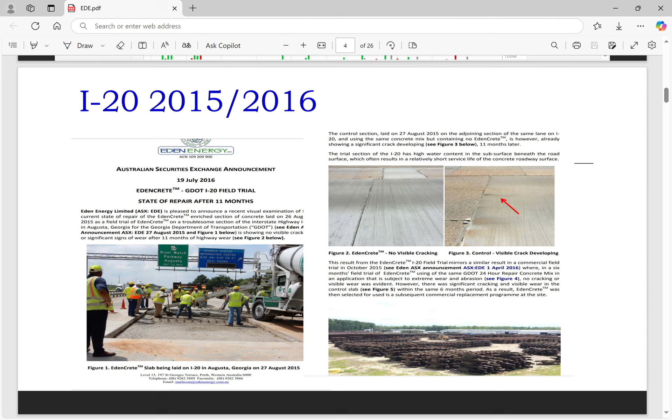It catapulted the share price 40x, one of the best performers in the Australian Stock Exchange at the time. So what is this product all about? At the moment, 2024, EDE has developed a few products already, but I'll focus on this edencrete.

Edencrete is an admixture based on carbon nanotube, and this is a result of research done at Monash University in Melbourne. Over years of research, they were able to come up with nanotube application as a concrete admixture, to increase the durability, flexural, tensile, and compressive strength and abrasion resistance of concrete, and reduces the shrinkage, permeability, and damage from salt and chemicals.

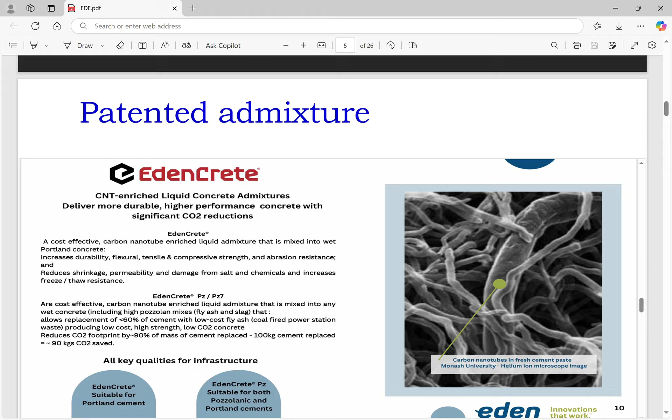So that's flexural strength. What is it? Ability of slab to resist bending. Tensile strength refers to resistance to cracking or breaking under tension, and concrete abrasion is durability from physical damage.

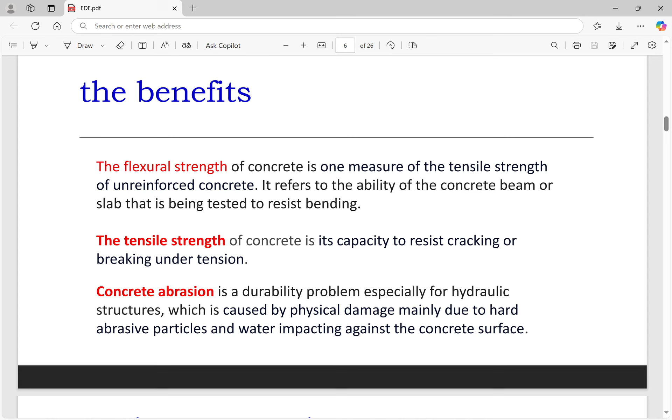If you Google carbon nanotubes, you will find that carbon nanotube is one of the strongest materials in nature. And so this was a learning part for investors. What's fascinating about investing in penny stocks is you'll learn a lot of things about the product.

And if you don't know about nanotubes before, you would have been very excited to learn about it in 2015 when investing in EDE. Carbon nanotubes show a unique combination of stiffness, strength, and tenacity. So there's a lot of information. This is just a snapshot from a quick search on Google, nanotube properties.

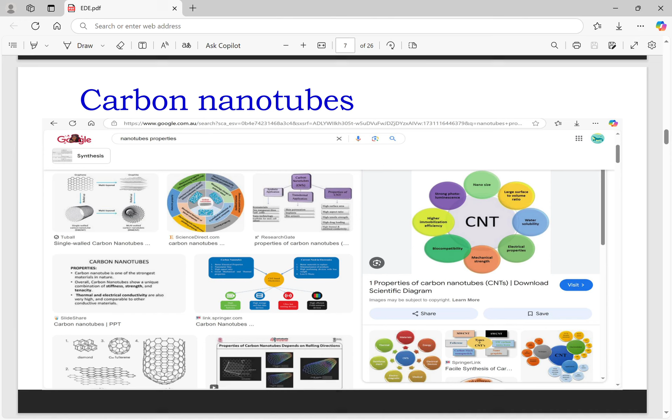So if you look here, these are slides from the company, not to encroach on copyright things. This is just for educational purposes. It's available publicly. Carbon nanotubes, this company has come up with applications into concrete, plastic, and the key properties. It's 100 to 300 times more strong than steel.

Amazing, isn't it? Carbon nanotubes, you can't see it with your naked eye. It has to be enlarged to show it like this, but you can just imagine it is up to 300 times stronger than steel, but it weighs 17% of steel.

That's why it was a breakthrough that Monash University came up with this output, that admixture application. It was exciting. We thought that as investors in 2015, 2016 in EDE, this was going to become a multi-billion-dollar company. You can't blame the founders, the Solomon brothers based in Perth, that they haven't given up on that vision.

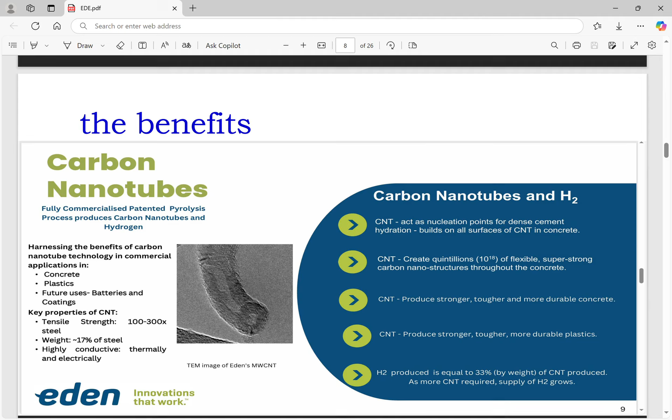In short, there was testing going on since 2015, very promising results there, as well as in various countries. Interesting that these tests were continued.

And in 2021, there's this test in Colorado Department of Transportation in I-70 Vail Pass. This is an elevated highway, 3,050 meters above sea level, I think that's the elevation. And it's subjected to such harsh conditions, especially during winter.

So what they have done here is test whether it's viable to use concrete rather than asphalt. I think on this road they used asphalt because it's easier to repair, although the repair has been very frequent. With asphalt, the cure period is faster, maybe in one day cars can go through again, as opposed to concrete where the curing period is longer. But they wanted to test concrete side by side with asphalt, and they created this test in 2021.

It's not just to test concrete versus asphalt, but also an opportunity to test admixtures in concrete, because Edencrete, the product of EDE, was already approved as an additive in concrete projects. In other words, it's been tested in Colorado for a long time, so it's now accepted and in their procurement catalog, so they can buy it.

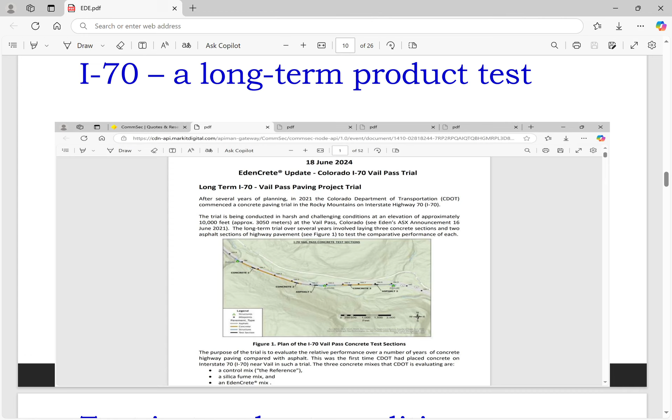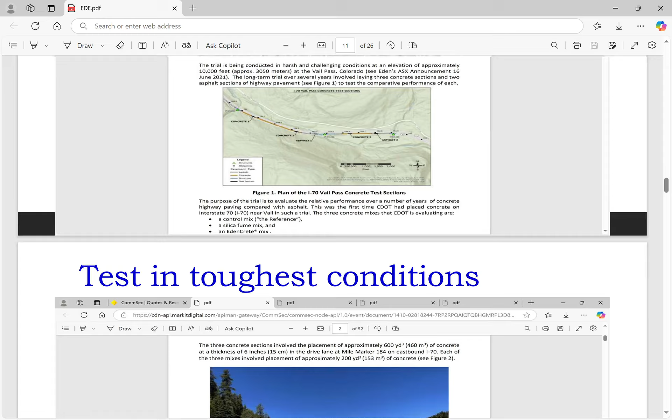So what they did here is create 3 sections of concrete on this road, alternating with asphalt. In the concrete portion, there's a beginning, middle, and end part, where they tested against the control, meaning concrete with no additives, and then 2 other additives that were added: one is Edencrete and the other is silica fume.

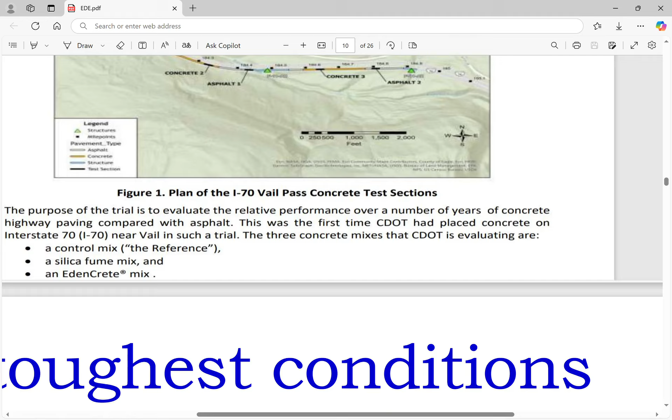The technical results were released to the company. I'm not a technical person, so I'll just go through the pictures that were presented and taken by the company. So here is the section of road, I-70.

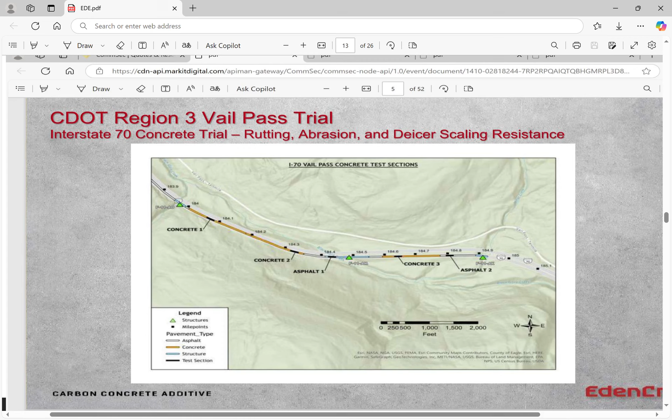Here are the pictures shown after the first, second, and third year since the concrete was laid side by side with the asphalt. This is the reference, meaning the section with no additives added, at the beginning section of the road. You can see that in the first year there's a crack developing on the left corner. By 2023 and then 2024, that crack has increased. So this is the concrete with no additives at the beginning section of the road.

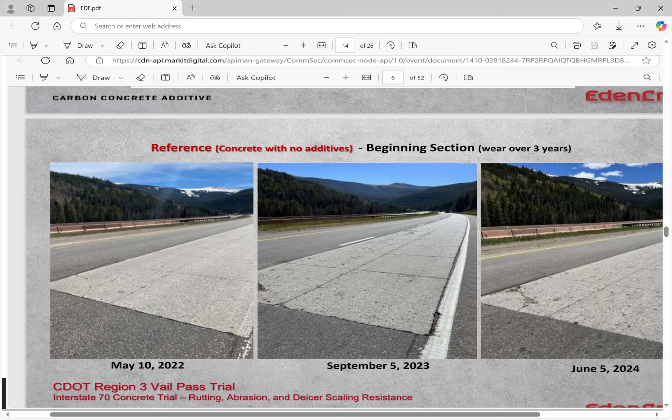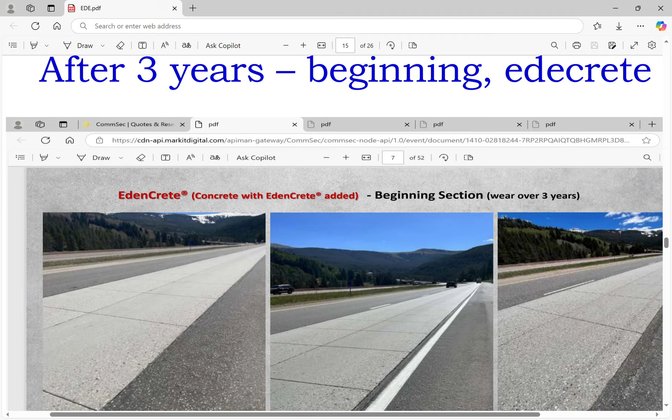This is the section with EdenCrete added, in other words an admixture with nanotube. You can see that in May 2022, September 2023, and June 2024, it looks intact. They were looking for rutting, abrasion, and de-icer scaling resistance—that's what they were testing.

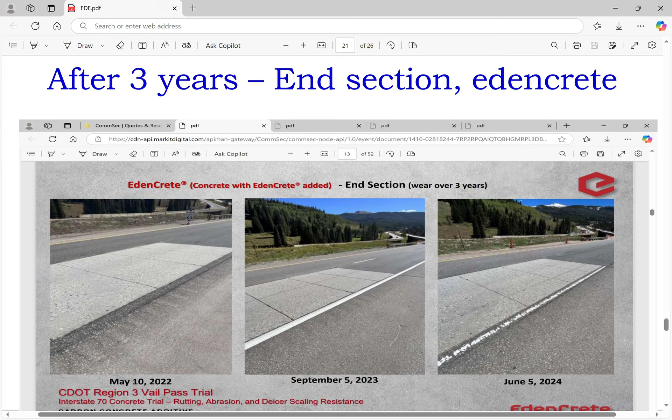With the Edencrete, there seems to be a better quality here, not as bad as the control. But silica fume also performed well here. Maybe it's not as bad as the other parts of the road, but you can see there are still some cracks there.

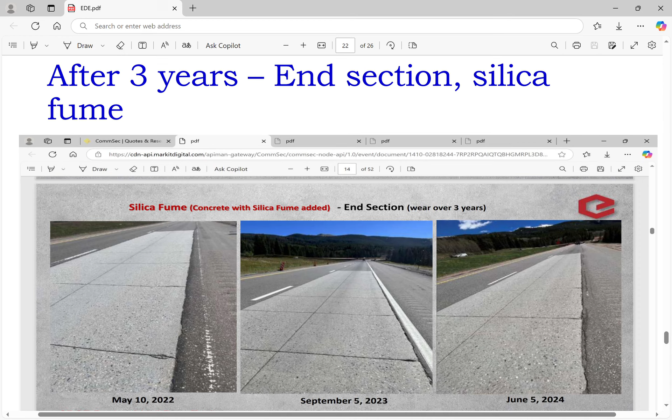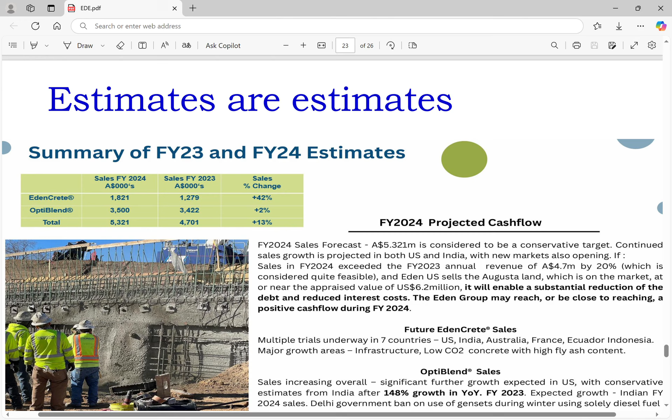So EDE estimated that their sales in 2023 and 2024 will reach around 5 million. In the future, I put a question mark here, but the company is projecting a bright future.

It took years for EDE before its product could be included in the catalog of the Department of Transportation in the United States and in other parts of the world, such as Australia, New Zealand, India, and Indonesia. So there's a very high barrier to market entry—you cannot just make a claim that your product is superior.

So EDE, such a small Australian company, has to undergo all that screening, testing, and even subject itself to long-term testing, just like in the I-70. That section of the concrete highway will be revisited every year in the coming years until it's time for it to be removed and replaced. That's how the company is feeling confident about its product. It's now accepted in 21 departments of transportation.